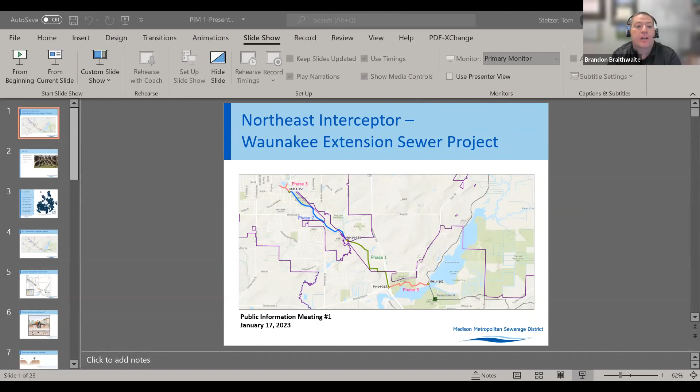Thank you everyone for joining this evening. As Amanda said, my name is Brandon Braithwaite, a project engineer with the Madison Metropolitan Sewerage District. I'm also joined by Tom Stetzer and John Solon from Strand Associates, our engineering consultant on this project, and Lisa Coleman, our Director of Engineering at the district. We are holding this public meeting today to share information about this project and to receive your feedback on our potential alternatives.

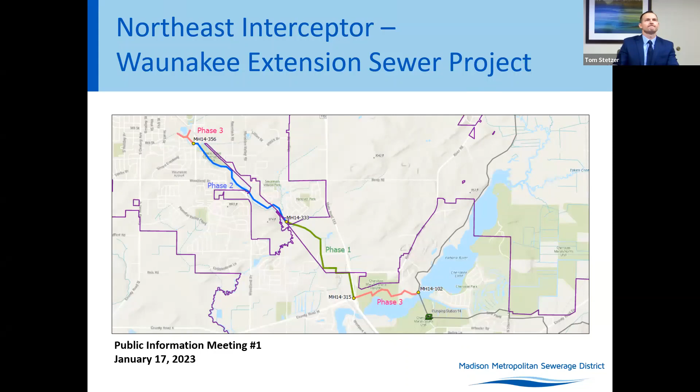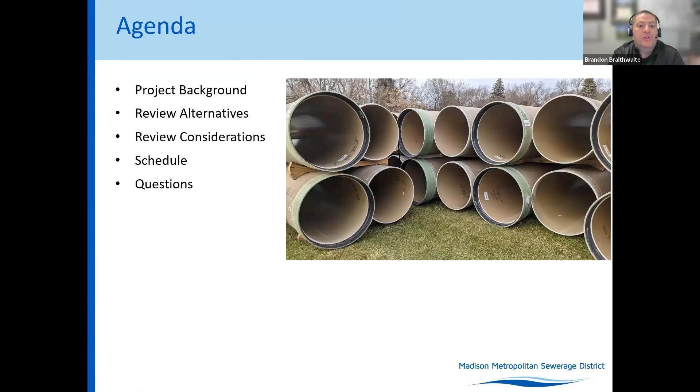A little bit about the district: Madison Metropolitan Sewerage District was created in 1930 by state statute to protect the environment and treat wastewater. The district now serves over 400,000 people in the cities, towns, and villages in the greater Madison area. An underground network of pipes conveys wastewater from the village of Waunakee and the town of Westport to the Nine Springs wastewater treatment plant located in southeast Madison.

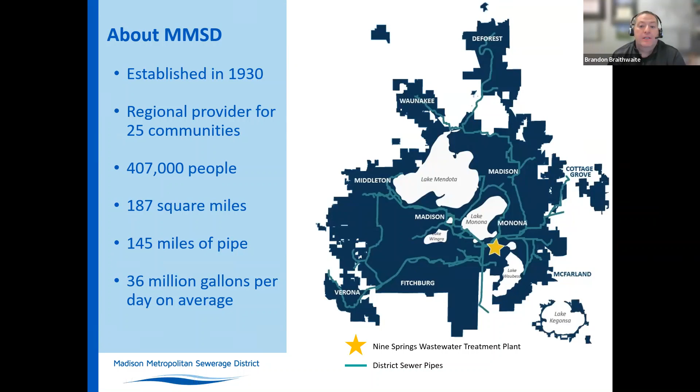Now I'll let Tom share more specific detail about the Waunakee extension system. So let's talk about the Northeast Interceptor Waunakee extension system. You can see here on the screen a map with bold blue, green, and pink lines showing the existing interceptor system. The existing Northeast Interceptor Waunakee extension system is located between the Yahara River on the south and the Village Center Pond in the village of Waunakee to the north. This interceptor traverses lands in the city of Madison, town of Westport, and the village of Waunakee.

The Northeast Interceptor Waunakee extension is a combination of 10-inch to 30-inch concrete sewers that was constructed in 1971 and is approximately 26,000 feet long. The first, most time-critical phase is Phase 1 in the green area, approximately 9,000 feet long, and is in need of additional capacity in the near future. Other phases are anticipated to reach capacity by 2030 in the blue area for Phase 2, and by 2040 for Phase 3 in the pink areas.

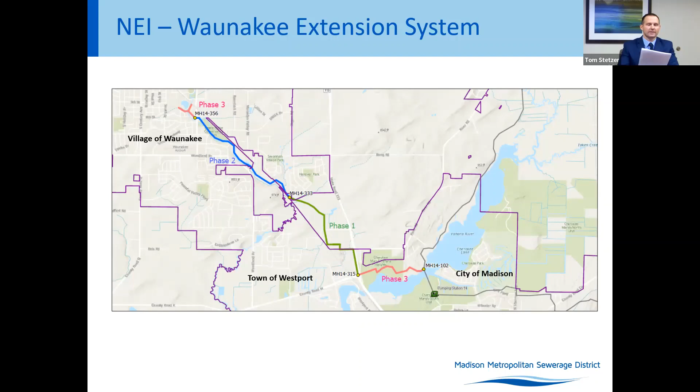It's anticipated that the needed additional capacity may be achieved through either a relief sewer, which is a new sewer constructed parallel to the existing sewer, or possibly with a replacement sewer to replace the existing sewer with a larger sewer, or possibly a combination of these two.

All right, so let's talk capacity. Capacity needs drive the project. The map on the screen is the same Interceptor map, color-coded based on when capacity is going to be reached in each segment, with priority being in the phase 1 area, the orange area, which by modeling is already at capacity.

As you all probably know, the Waunakee area continues to grow. So if we do nothing, we will exceed the current capacity of the Interceptor system in the near future, meaning it will not be big enough to carry wastewater flows to the plant. This would lead to potential sanitary sewer backups or overflows in the future. To keep that from happening, we need to add additional capacity by either replacing the existing sewer pipe with a larger pipe, or possibly a relief sewer, which would be a parallel sewer.

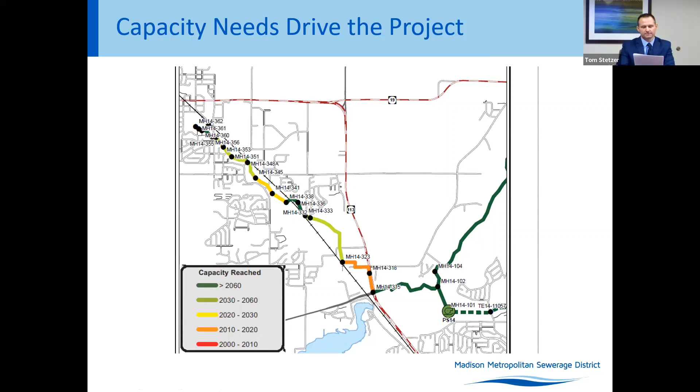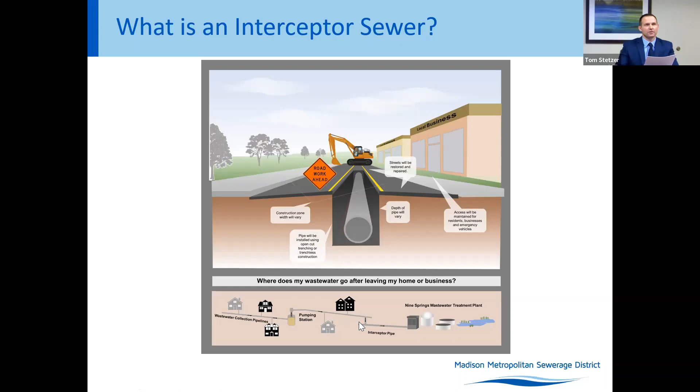The graphic on the bottom shows wastewater flows from businesses and homes through laterals to local sewer pipes, flowing downhill, sometimes to pumping stations if needed to pump over hills. If not, it flows directly into an interceptor system that takes those flows directly to the wastewater treatment plant.

Some more basics on interceptors. How is an interceptor sewer installed? There are two primary ways. The first one is through an open trench method, used with an excavator in areas where we have space to dig an open trench to install that sewer.

The other option is for areas where maybe we have a busy highway or a railroad to go underneath. In those areas we would likely use trenchless techniques, where we would bore and jack a new pipe underneath the existing feature, whether it's a roadway or railroad, to get that pipe installed without shutting down service to those areas.

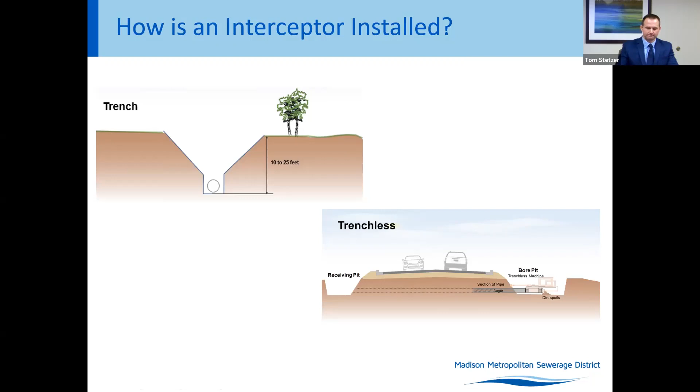All right, so alternatives analysis. As I mentioned previously, additional capacity is needed in the existing system. As a design team, we've been taking a look at many different options for pipe replacement versus pipe relief, starting out in the South near the Yahara River, all the way up to the North, into the heart of Waunakee.

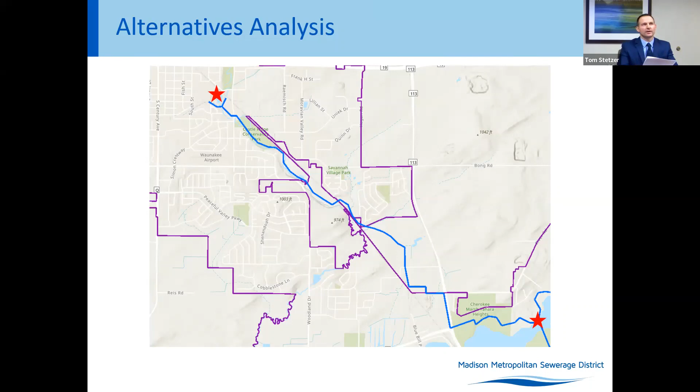So what goes into what types of things are considered when we look at these factors that go into an alternatives analysis?

So the next slide, I'm going to transition over to John. He's going to walk through the alternatives analysis that we've completed so far, looking at some potential routes for this interceptor sewer by starting with phase 1.

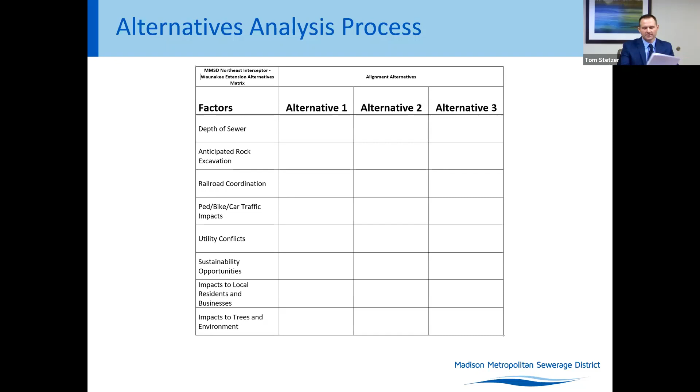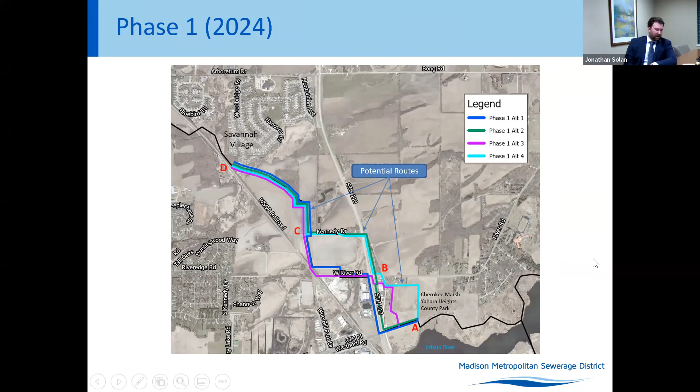So that kind of segment 1 from point A to B. Again, A is just an existing sanitary manhole that's in that county park, and B is the intersection of State Highway 113 and West River Road. We'll look at that on this slide. The black line by point A on the exhibit is the current route of the existing interceptor, and that area is actually phase 3, which I'll talk about in a couple slides.

So before diving into our routes, I wanted to briefly expand on what Tom said earlier about the difference between a replacement and a relief. I'll use those words interchangeably when talking about alternatives. A replacement option takes the existing pipe offline after a larger pipe is installed. A relief is when you keep the existing sewer pipe in service post-construction and relieve some of the additional flow with another pipe, possibly right next to it or on a different route.

Getting into the alternatives, phase 1 alternative 1, the darker blue line, is a replacement alignment. Underneath that dark blue line is the black line, which is approximately where the existing interceptor runs today. From point A, it would cross over to the 113 County Highway M intersection.

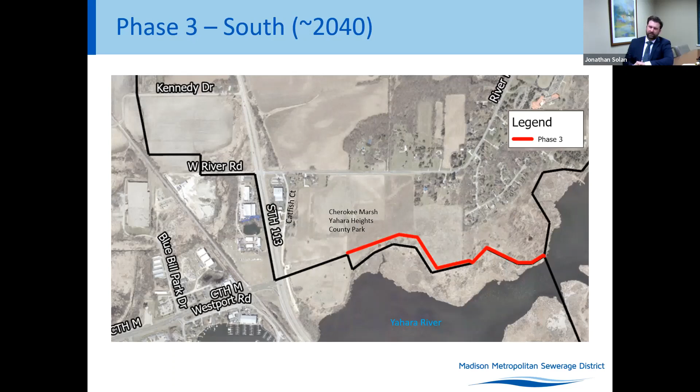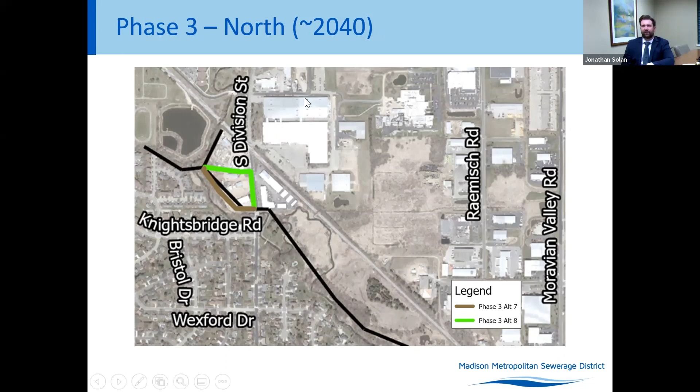So with that, I'll go to the last slide, kind of a summary slide. Obviously I talked a lot about phase 1. Phase 1 has a lot of options for consideration, and we're trying to find the best route, combinations of routes, as we work to design on that phase.

Phase 2, again, as we look through the topographic constraints and the development around that area, we feel that the existing pipe's in a really optimal location, so we'd be presenting a replacement through that section. And then phase 3, again, has some constraints with topography and some of the businesses around that pipe, but we do feel there's some potential to at least make those structures more accessible with the alternatives we're presenting. With that, I'll hand it back to Tom to continue the presentation.

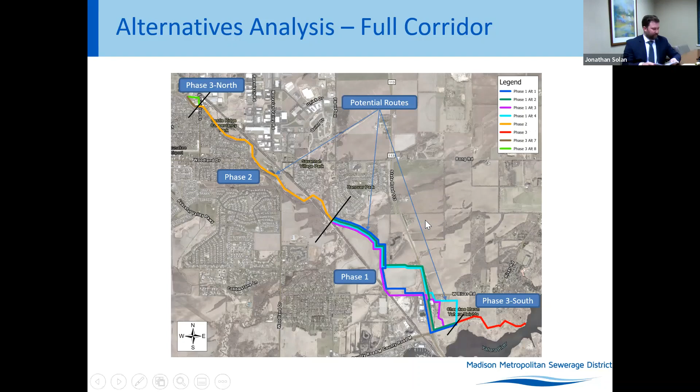Yeah, thanks, John, for the summary and walking us through the routes there. So what's next for us on the design team?

First and foremost is to compile all the feedback we've received. Not only have we had meetings with municipalities along the route and some property owners, but also feedback from anyone on the video tonight. We'd encourage anyone to give us your input, and we'll consider all of those things along with the technical implications we find along the way. Our goal in the short term is to select a route.

By selecting a route in the near future, we can jumpstart some of our field investigations related to the selected route, and then jump into that detailed design phase so we can get some true design work done to prove some of our concepts.

I mentioned the stakeholder feedback, and this is critical. As a design team, we can investigate, survey, and do our research, but sometimes the best information comes from the property owners and the municipalities. Maybe some things we just don't see while we're out there, and people who have lived there for many years can point us to things to consider. So we appreciate any feedback we do get.

I mentioned those field investigations. So what are they? First off, topo survey. You may have actually seen our surveyors out there within the last week, getting set up and ready, setting some control points and benchmarks while we sort out the rest of our alternatives analysis. That'll be one of the first things we do here. Hopefully the weather holds — it's been good for surveying, so I'm hoping for brown and green grass moving into February.

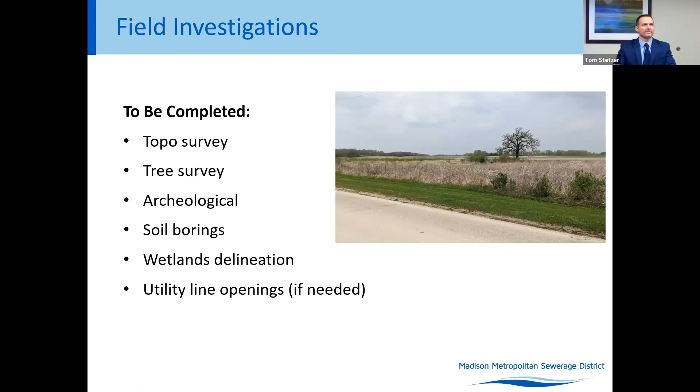All right, so schedule. Everyone's probably wondering when all this might be occurring. John had mentioned, and I had mentioned earlier, that phase 2 and 3 are out quite a ways — we're looking at like 2030 and 2040 respectively for those phases. So for the current phase, on the south end, that's what we're focused on in the short term for detailed design.

We'd like to circle back to another public meeting while we're in the design phase, just to let everyone know where we landed on our final design selection, based on everyone's input and also the evaluations that we did — with the end goal of having this project bid out next winter, which would allow construction to start in 2024 at some point.

And again, coordination along the way with all the municipalities — with Westport, Waunakee, the Madison residents, businesses, property owners — to keep everyone informed and also keep receiving input.

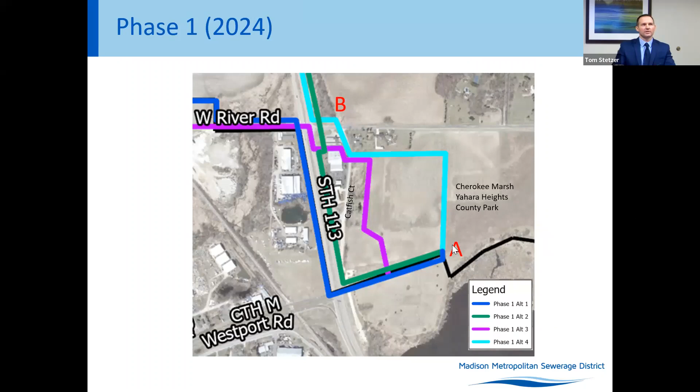Another question from Russell: Does phase 1 work start at the south end at point A in the presentation and work its way north to point D? Good question. More often than not, these gravity sewers are laid from downstream to upstream. A is the downstream point where the existing flow travels east and southeast across the Yahara River. So in almost every situation with a gravity pipe, yes, they would start near A and then work their way upstream through B, through C, and then through D.

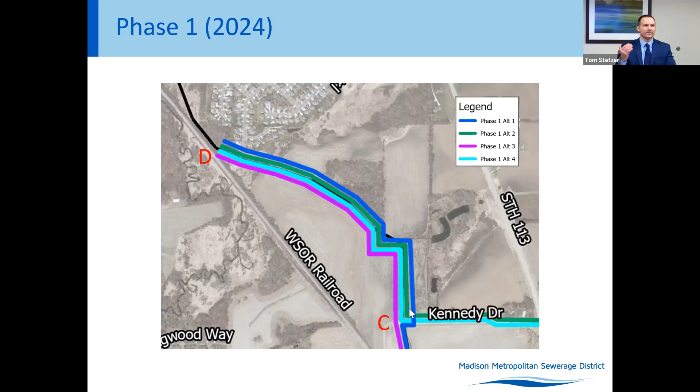Once in a while, if there's a time constraint, maybe a contractor can only get through a certain area during certain months, whether it's wetland related or a roadway crossing for shutdowns, there are times when they do have to jump around a little bit. It's not ideal, but I've seen projects where maybe they do part of C to D to avoid some timeline issue, then jump back and continue on the other segment. So it depends. But generally speaking, best case scenario, yes, A all the way to D.

Another question here: If you replace the existing, do you replace the original pipes and manholes? I think we answered that a little bit earlier, that you expressed verbally. So yes, those would get abandoned if it's a replacement. If it's a relief, the old stuff's going to stay in place in those sections.

And then, do you remove the existing? I guess it's a little bit case by case on whether we remove the old infrastructure. Standard protocol, where we'd start the discussion, is with the old pipes. If we're not installing the new stuff right where the old one is, say it's just offset a little bit, the typical way is we'd abandon those in place, likely fill them with concrete slurry, and then all existing manholes that currently stick up above ground would be removed to below grade and also filled with concrete slurry to an appropriate depth.

Now, if there are areas where we have to replace in the exact same location as the existing pipe, then yes, the old stuff would get removed as we go. But like John mentioned, that requires a lot of bypass pumping, which is a little bit riskier, but also quite a bit of added cost too.